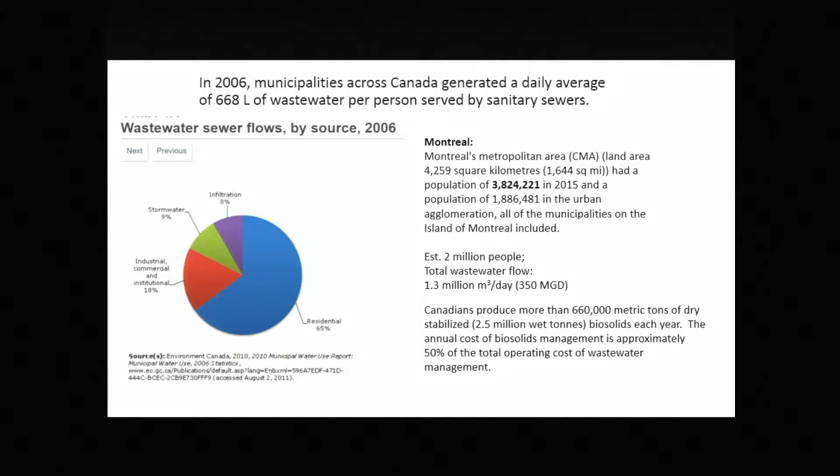But I was also participating in a class last semester, and some of the issues students had to think about were in terms of the water cycle and wastewater. Dominic already addressed some of those aspects, saying that per person we're producing a lot of wastewater. So just looking at the Montreal metropolitan area, we're producing about 1.3 million cubic meters per day, or 350 million gallons per day in wastewater, which produces a lot of solid waste. And so that's a lot of organics which could be used some way.

Similarly, when we look at solid waste generation in Quebec or in Canada, we're producing a lot of organic waste or just regular waste. So 1,700 pounds per year per person of municipal waste. It's a large industry, as was already stated earlier. So we're talking about $1.3 billion in municipal solid waste management costs.

And when you look at the materials in Montreal, so this is a slide, I'm not sure whether you can see this. When you look at a split of solid waste in Montreal, about 50% is organic solid waste in a residential area. Only 8% at this point is recovered, recycled. Most of the other part is waste and ends up in landfills. Recycled materials like paper and other materials are more recycled, 40%, but again, there's a lot of potential in terms of recycling or recovering essential resources from that solid waste stream.

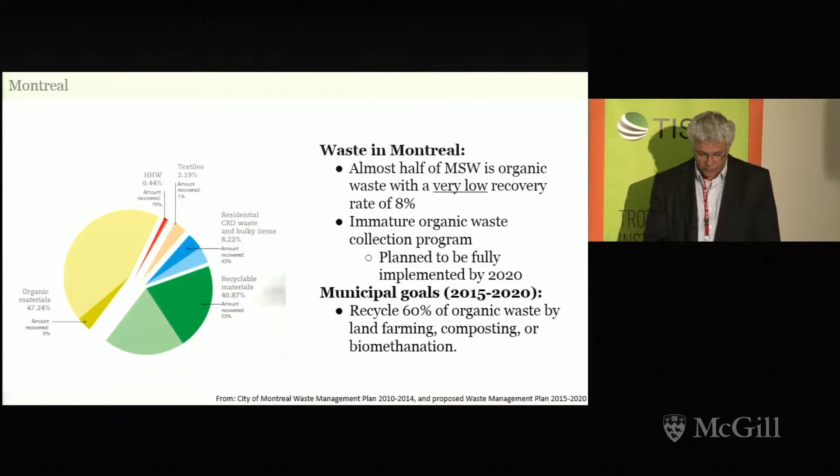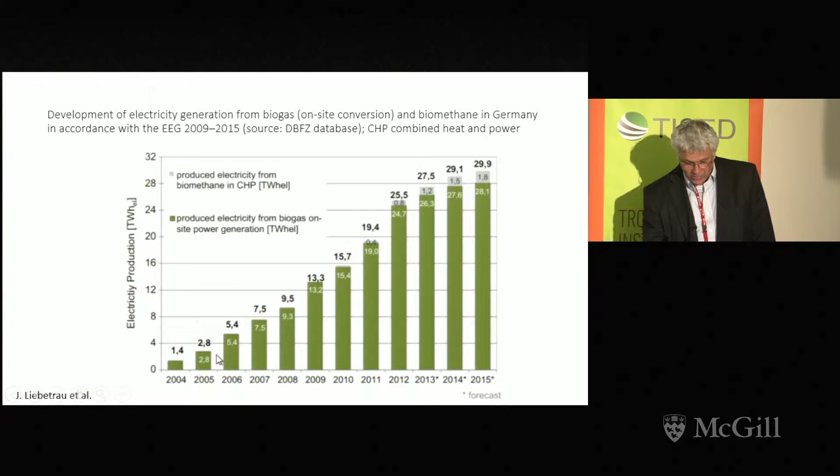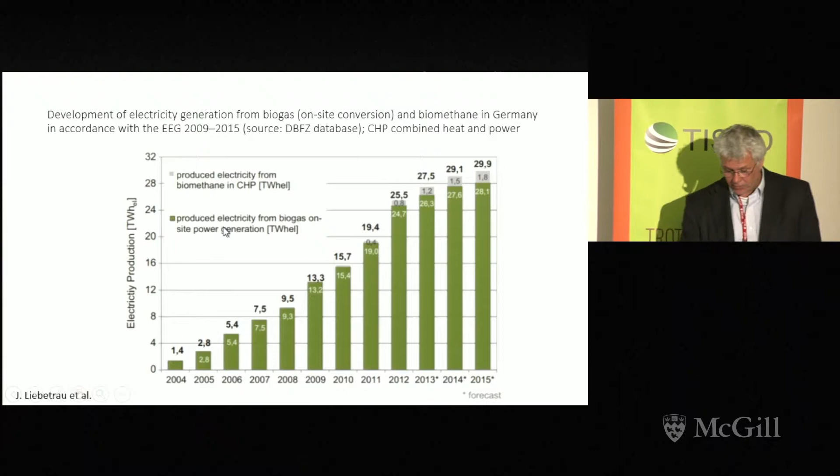So when you look at the growth in Germany, the biogas plants had a significant increase in electricity generation over the last 10 years. So you can see this went from 1.4, so almost a 20-fold increase in electricity production. So it's a significant increase, and the increase is really driven mainly by, not surprisingly, energy prices. And I can show you this in a second.

When you look at electricity prices, just as a comparison, in Montreal, this is from Hydro-Quebec for residential areas, in Canadian dollars you're paying about 7 cents a kilowatt hour. In the United States, we're paying more, not surprisingly, than in Quebec. And when we compare that to Germany, converting it to Canadian dollars, that's about 44 cents a kilowatt hour. So significantly more than in Montreal or in Quebec.

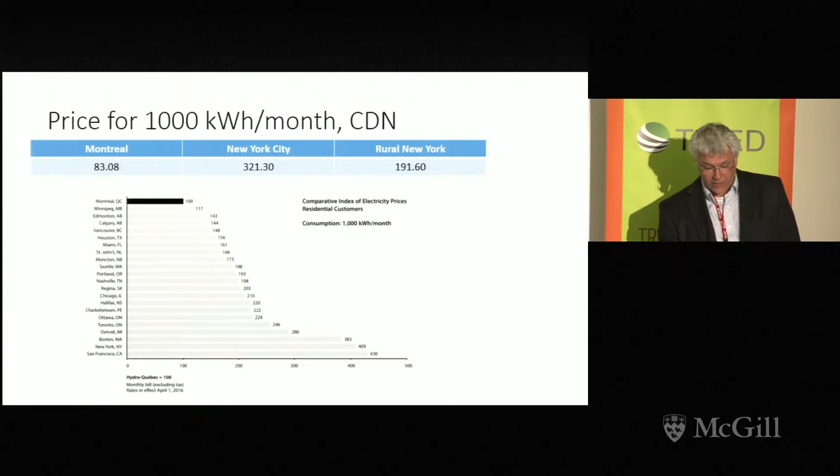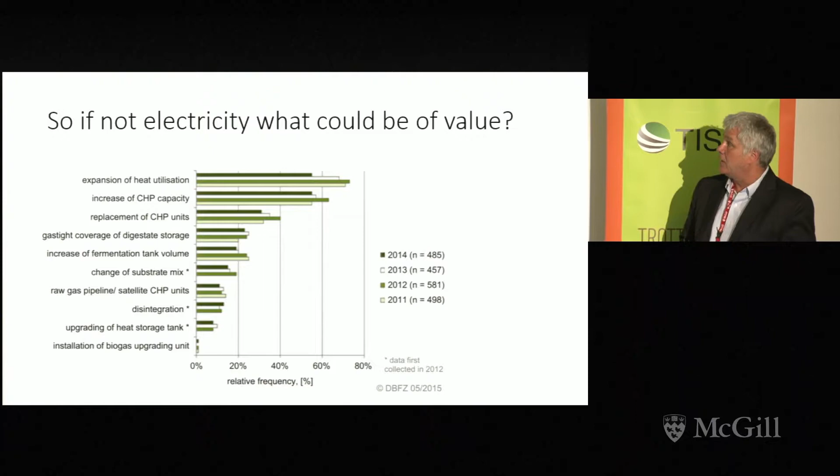So if electricity is not the driver, what else can we use to ultimately make use of that resource, that carbon high energy resource? And so there was a study done which then looked at other capacities, and I think even the urban digester facilities in Europe, they make use of, for example, heat, right? So heat is certainly an area where digesters could help, or anaerobic technology could help significantly.

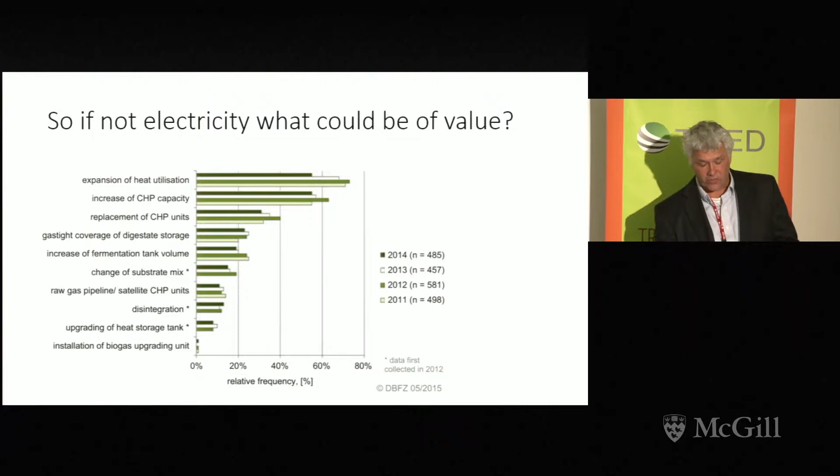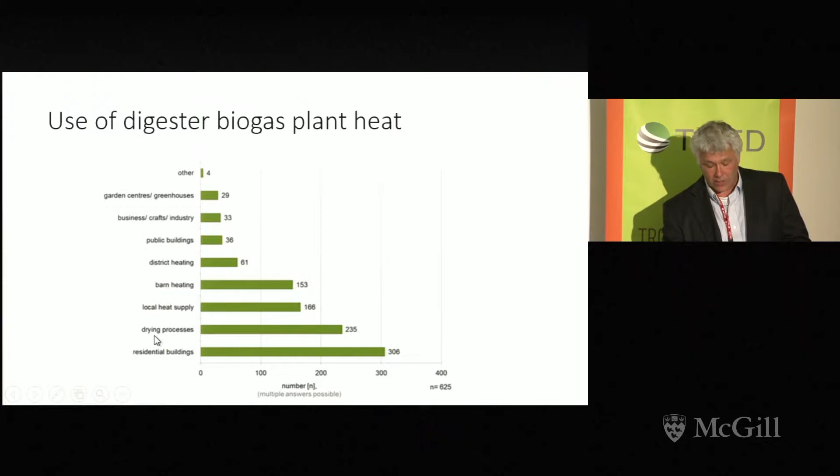Others increased in capacity, CHP capacity, so combined heat and power capacity, again, because electricity prices are high in Europe. So this heating is used mainly for residential use or for district heating in Europe. So that would be one possibility of using the energy generated other than electricity generation in a typical biogas plant,

a digester plant. I want to show you a couple examples which we have done in northern New York, just to give you some other potential resources which we can recover from anaerobic digestion. And so the one I've been involved in, this is a large facility in northern New York where that facility has electricity prices of 2 cents a kilowatt hour. So through economic development, they get actually very low electricity prices, yet they were interested in installing a digester, and not because of electricity generation, but mainly because, in addition to electricity generation, they could use the

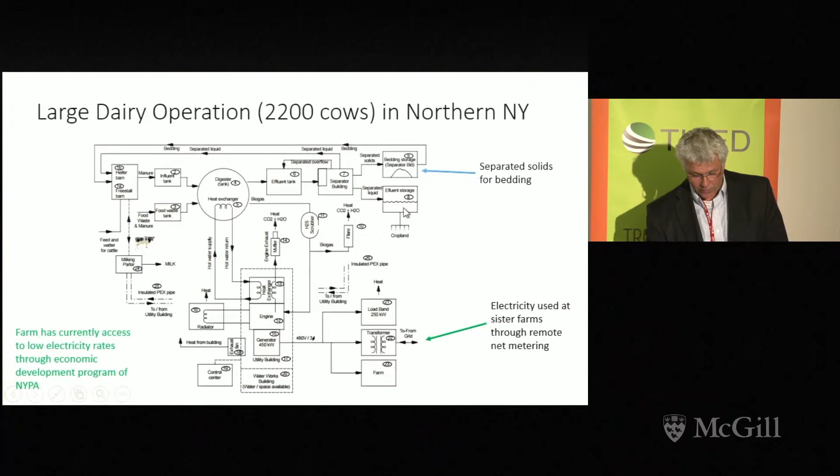solids removal. Here we go. So they have a digester, and they're ultimately removing solids. The solids are used for bedding, and I'm going to explain this in a little bit more in detail. So electricity, they're producing about 500 kilowatts in power, which they can share among several of their farms through net metering arrangements, but then they are using the bedding also for the animals, and that makes the system economical.

So for those of you who might not know too much about large-scale farming, large-scale dairy farms use essentially these freestall barns, where the cows can move freely in areas, and they can lay down on a bedding material. That bedding material, the more comfortable the cow is, the more milk produced, the more the cow likes to lay down, and the less energy it wastes by walking around, instead producing milk.

So the farmer is always concerned about a very comfortable bedding material, which ultimately allows the cow to produce the maximum amount of milk. That bedding material needs to be clean, because if the cow gets sick, they can't sell the milk, right? So pathogen content is very important for that bedding material, because that could potentially be an infection for cows.

And so these large-scale dairies potentially use bedding materials like sand, which is inert, and it has very little ability to host pathogens, right? But it has a lot of concerns in terms of materials handling because it's very abrasive. But some farmers really like sand because it's very comfortable. Sawdust is another very common bedding material, but now the price of sawdust gets high because of competing markets in terms of pellet manufacturing. So the price is very high for those farmers.

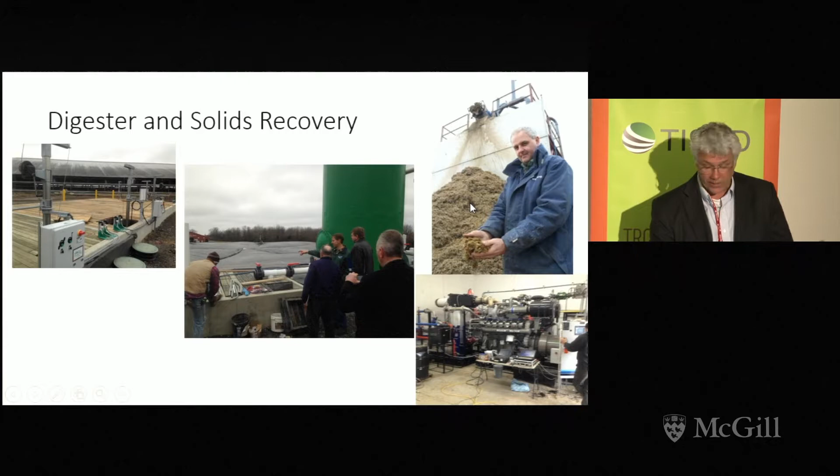the recovered solids. So the material goes through the digester for 30 days. It would be separated through a screw press, and this is the material that comes out. And that's the material the cows will ultimately be laying down on. When you look at the straight economics, there's a lot of numbers, but the one I want to focus on is, this is about a $3 million capital cost project.

The farmer essentially replaces about $110,000 worth of electricity costs yearly. Even at that low electricity price, that's the savings he has. But in bedding, he saves about $330,000. So when you take both numbers together, the payback period of that process was about 7 years. So even though electricity prices are low, just because you have the market of replacing organic materials, it becomes a very economical design project. And it's very simple in that regard.

I want to give another example of a very small food digester system. So talking about a waste management system in a very small town. North Elba is located in Lake Placid, where the Olympics were in 1980, so a long time ago.

So it's a progressive mountain town who want to essentially reduce waste disposal fees and make some money in the little village. And so that system is very small. It only treats about 1,000 tons of food waste per year.

Again, that town has economic development funds, so electricity is really not an issue. They're paying about 3 or 4 cents or 5 cents a kilowatt hour. So it's not the driver. The electricity pricing is a minor driver of that process. So this is a system which comes essentially in a containerized system.

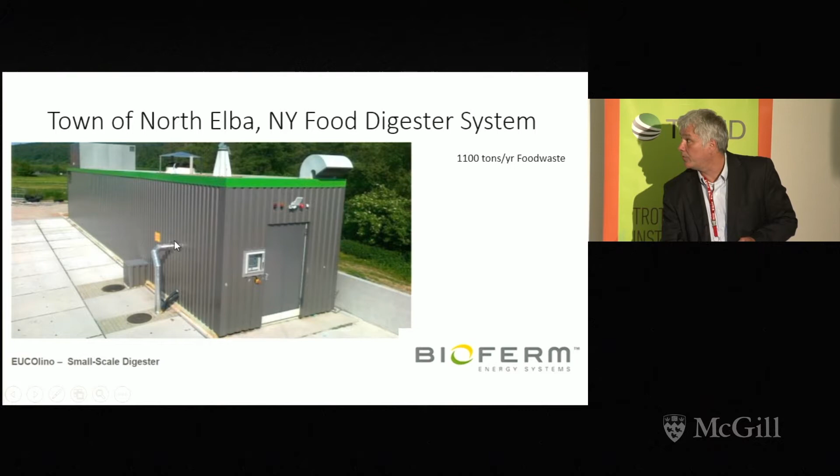And when you look at the economics, the numbers are very small. The electricity generation is about $15,000 a year, so it's a very small system. But what they ultimately make money off is the tipping fees, right? So the tipping fees, the disposal fee of collecting the organic waste, that's the money-making system. And even that system at the small scale becomes cost effective.

It becomes cost effective predominantly because the town has funding from the state to ultimately install this. So the capital cost is ultimately paid for through a development grant. If it didn't have that grant, then the payback period for that little tiny system would be very long, right?

But both of those systems illustrate that electricity is not the necessary driver, but the driver in this case is the management practice, so the solids removal, or ultimately the solids recovery for the particular business.

So another example, what we have done in our labs is, when we're taking food waste, we're looking at the impact of inhibition. So it's well established that, for example, ammonia is very inhibitory at high concentrations for that process. And so what we've been working on is to remove ammonia during digestion.

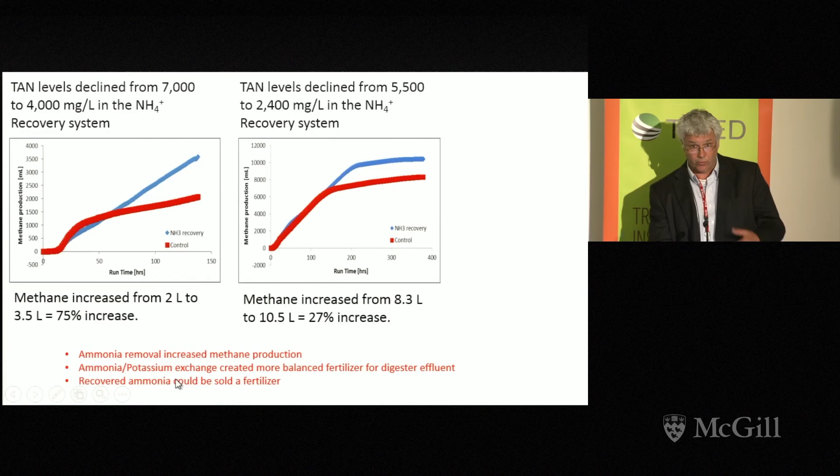So what that shows us is that now in that process, like I said, we have a method of increasing biogas production or methane production. We have a potential to balance the fertilizer value of our effluent, which increases value, and then the recovered ammonia on its own through the membrane system, we can also use for other needs as economic growth. So all three things together will make that process more economical for food waste, for a specific waste category.

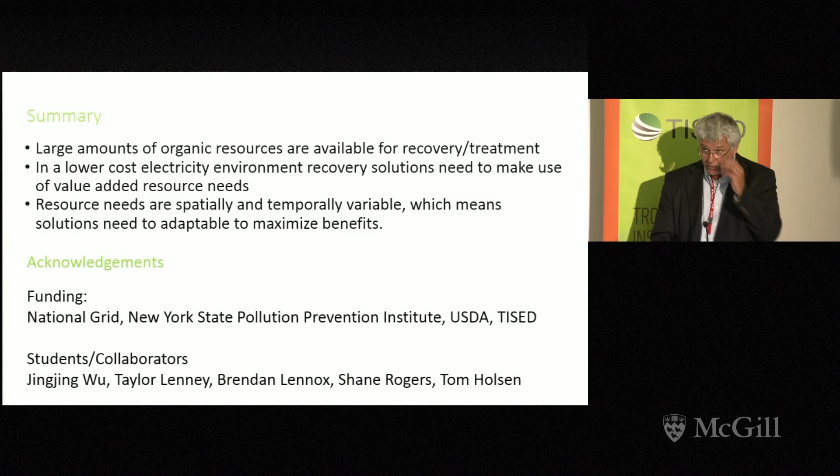So in summary, I presented you some data where we have large amounts of organic material produced in local areas, even in urban areas and agricultural areas. Because of the lower cost electricity environment like in Montreal or in Quebec, the focus really needs to be on resource recovery, on other means than focusing solely on electricity.

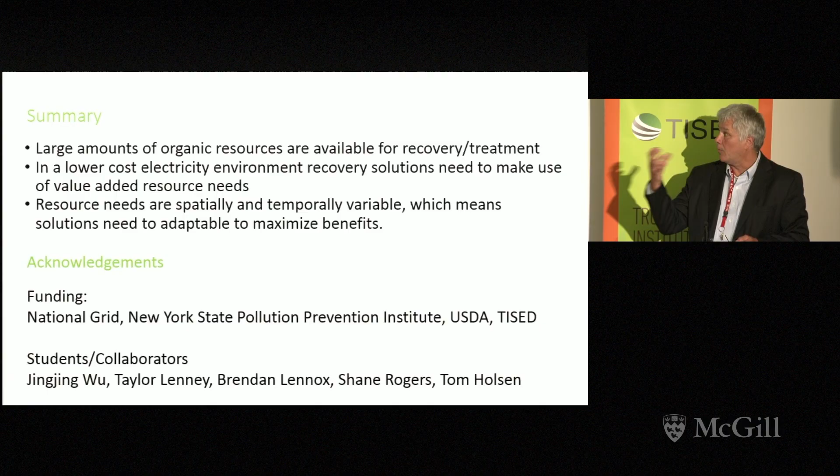All those resources, especially when we look at the resource needs, what we use these resources for, are temporal and spatially dependent. So it doesn't pay to truck manure or organic waste for very long distances because that's very costly. So the best solutions are local solutions where we have less transportation costs, where we meet resource needs and resource availability. And I think that really needs to be the key in coming up with resource recovery processes. So, all right.